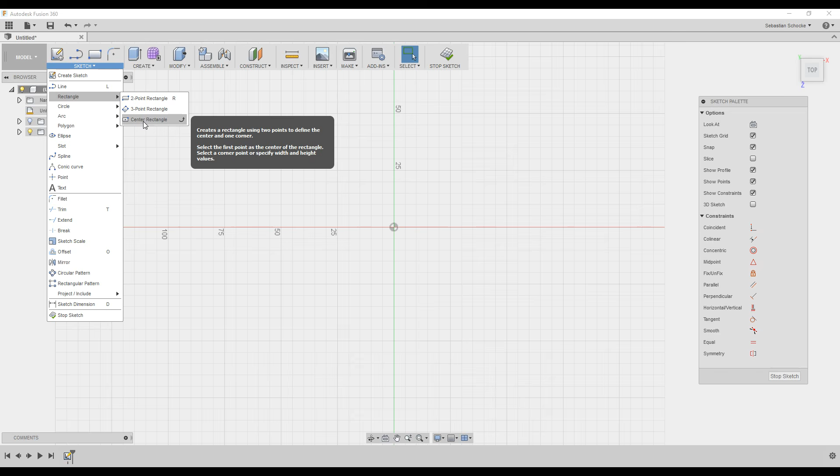The reason I use center point rectangle, as a quick tip, is I like to create all of my sketches around the origin point of the object. It makes for simpler symmetry and working with assemblies in the future when we have multiple components. So let's go ahead and do a center point rectangle.

Then we switch back to our drawing quickly. The height was 53.3 and the width was 68.6. This one was 53.3, 68.6. Pressing tab after you've typed in the dimension will lock that dimension in place, as evident by the little lock icon next to it. Now press enter. We will now have our fully dimensioned rectangle.

Quick tip number 2, to get that to fit nicely, you can simply double click your middle mouse button and it will make sure to bring the entire sketch into the viewport.

Now this will be the outline of an Arduino board, but let's face it, manufacturing isn't perfect, so we can't create an enclosure that will fit perfectly around an Arduino UNO. What if it's 0.1 millimeters longer than what it should be? So we are going to create an offset around this shape to give us some space.

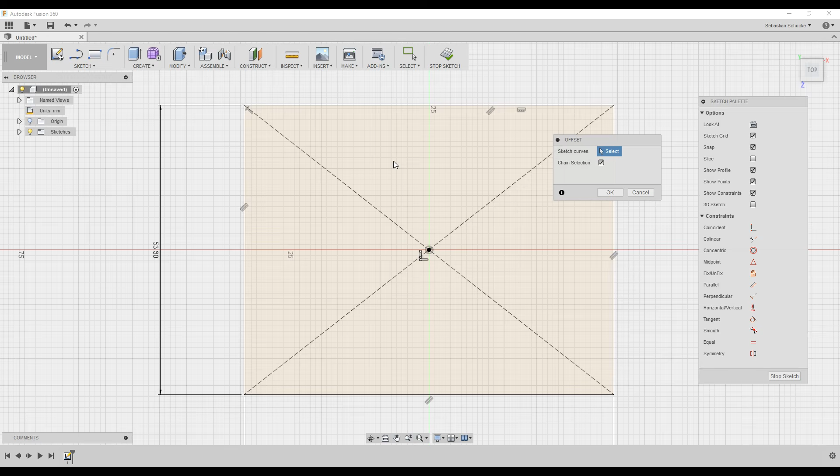Under the sketch option is the offset command. It's got a shortcut key of O, for future reference. Click the shape of the rectangle and it will allow you to create an offset either inside or outside of this object. I'm going to say I want to create a 1 millimeter gap around my board for the inside of my enclosure. Hit OK, and now we should have a second rectangle in place.

Now, as this rectangle, the inside rectangle, plays no part in our actual geometry and is simply there for reference, I'm going to convert it into construction lines. Construction lines are like these dashed lines that are present on the sketch already. They are there simply for construction purposes, i.e. they don't play any part in your actual geometry. They are simply there to provide reference points for the rest of your sketch.

To do that, you select your line and then under your contextual options you have normal/construction. This toggles the line between a normal line and a construction line, or one could use the shortcut key X. So once you convert it, you should see it turn into a dashed line. I'm going to do that for the other 3 edges of our inside rectangle. And now we have our rectangle giving us our profile for this enclosure's inside.

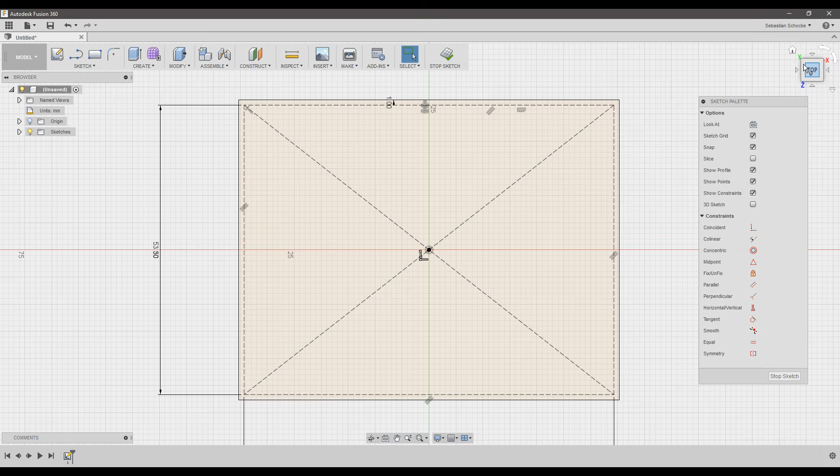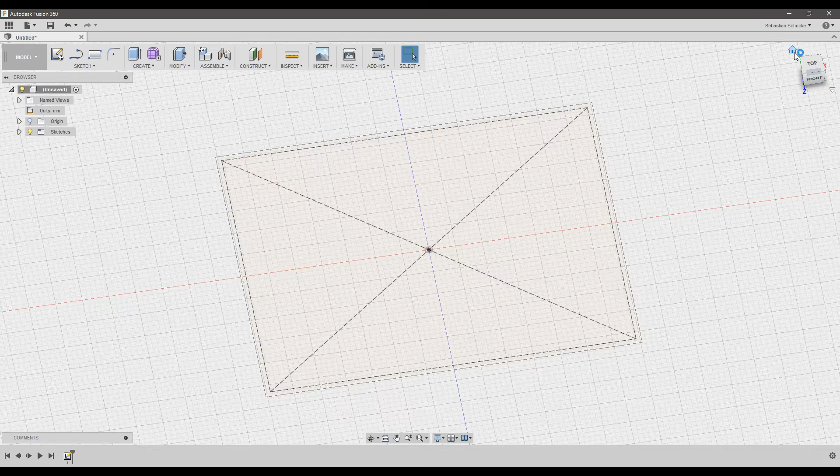I'm going to stop this sketch here and return to 3D view. The view cube up here always tells us what view we are currently in. It gives us options to jump to different views. Also, if you hold shift and the middle mouse button and drag, you rotate around your design. In this case, I like working in the home view, which is a 3D view of your current design.

And now we are going to take this rectangle and get a cube by extruding it. To create, there's an extrude option, shortcut key E. Use that to turn this into a solid object.

So first of all, it asks us to select our sketch geometry, which is our rectangle, and then we can use this little arrow to drag it out to the size we want it to be, or you could also type in the height that you want. In this case, we want this to be 22 millimeters high. Why 22? It gives us enough space for an Arduino and some leg room on the top and bottom.

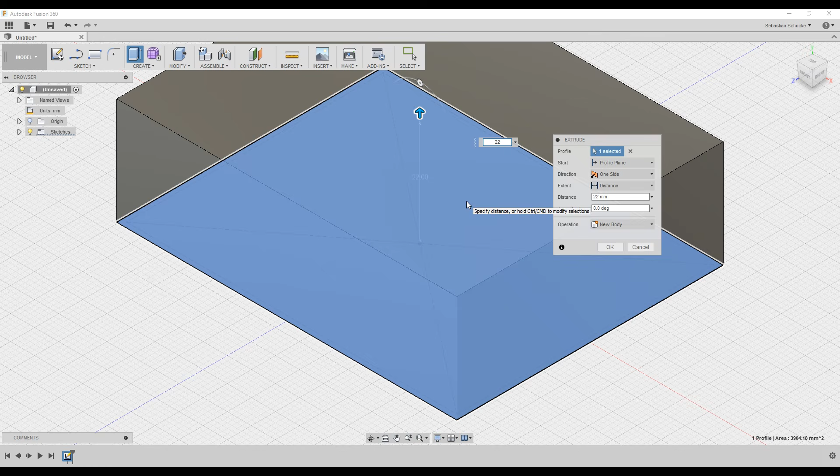Press on the home button again, it should bring our cube into view. Next, this may seem very counterintuitive because all that we have now is a solid cube, and at that we create the cube around the inside dimensions of what we want our enclosure to be. Seems very counterintuitive to design this way, but what we have actually done is we are going to use a trick in Fusion 360 specifically for situations like this.

This block represents the negative space we want to create inside of our enclosure. So to do that, we want to create a shell around this space. Use the modify shell command. What shell does is it removes material from a part interior, creating a hollow cavity with walls of a specified thickness. What we are going to use it for is a trick, though.

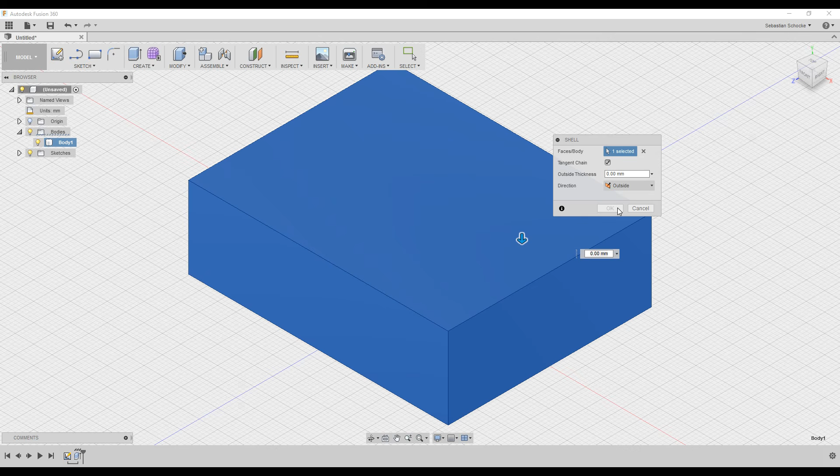We are going to use this entire body. So instead of selecting each one of the faces manually, we are going to expand our bodies here. We're going to say, I want to create this body, and then our direction that we are going to use is outside. What outside means is we are going to create a shell around the outside of this body instead of shelling this body itself. And then I am going to make the thickness of this shell 1.6 millimeters. Okay.

And now it looks like we have simply created a slightly larger cube. How do we know that it is actually hollow inside? We are going to use one of the features from Fusion 360, section analysis. Under our inspect menu, see there is an option called section analysis. Section analysis allows you to create cutaway views of your 3D geometry. I'm going to select this face. Then as we drag this backwards, see we have actually created a hollow block.

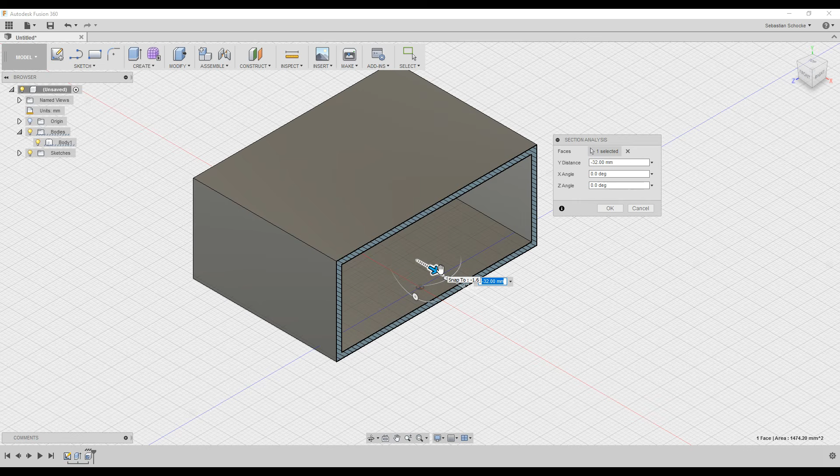We don't need to leave the section analysis in place. It is purely there for viewing purposes to make sure that our command has actually succeeded. So in this case, I am going to cancel it, and we are going to work further from here.

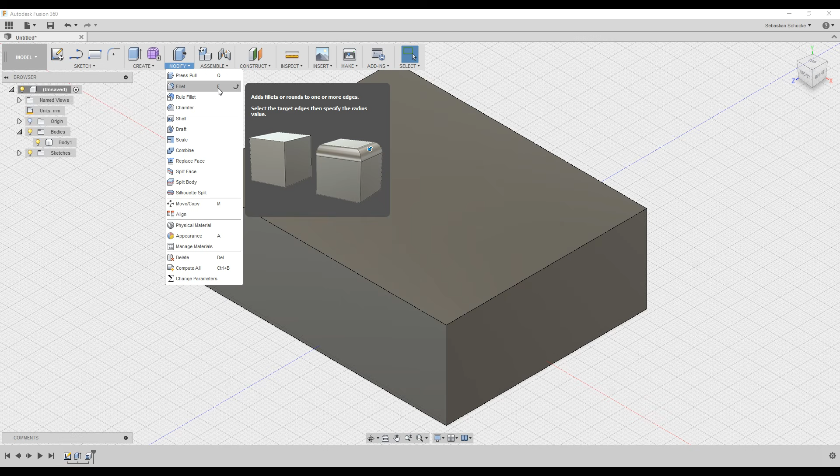Next up, what I want to do is I want to create rounded corners for my enclosure. Simply, I do not like these sharp edges, and I do not think that it will be very aesthetically pleasing. So we will go and modify our object once again, and then you'll see there's a command called fillet. Fillet rounds an edge. It is a very often used command, so it also has its shortcut key F, and then it asks us which edges do we wish to fillet.

In my case, I want to do this upright edge, this upright edge, rotate around this way, this upright edge, and this upright edge, and I want to fillet by 2 millimeters. 2 millimeters creates a 2 millimeter radius edge. Once you're happy, go ahead and hit OK. And if we look at our object, we have neatly rounded edges now.

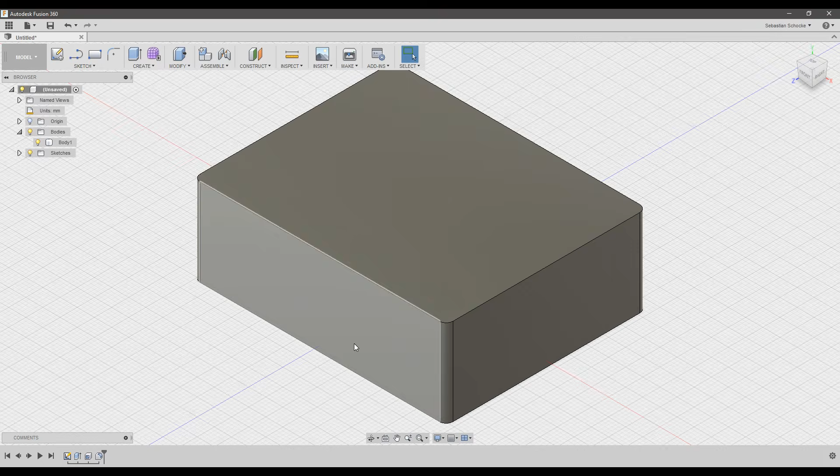Now, this enclosure is pretty useless to us at the moment because it's a solid box. You can't get anything inside of it. Let's fix that. We want to slice this box exactly in half so that we have a top half and a bottom. To do that, find a midpoint between the bottom and the top of this box. We are going to create what is called a mid-plane. Under your construction options, select mid-plane. It creates a construction plane at the midpoint between faces or workplanes. We want to create the mid-plane between the top of this box and the bottom of this box, and you'll see our workplane.

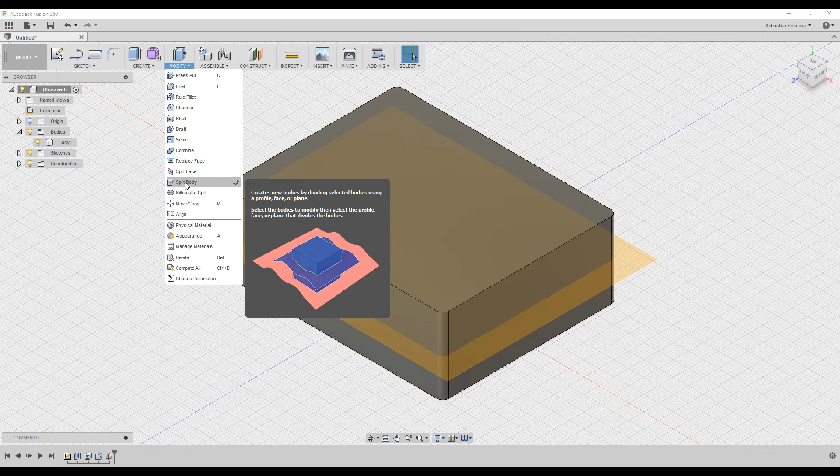Now what we want to do is we want to actually split this body along this workplane. Once again, we go to the modify option, and there's an option called split body. Split body allows you to split a physical body into more along any plane or profile that you can select. In our case, we want to split this body, and as our splitting tool, we want to use this midplane. You should get a red circle indicating how it's going to cut. If we hit OK, you should see body 1 and body 2 have become 2 bodies.

You can now turn off this construction plane, and then have a look. You can switch off the top of this lid, the lid part, or we can switch off the base part and have a look inside of our lid.

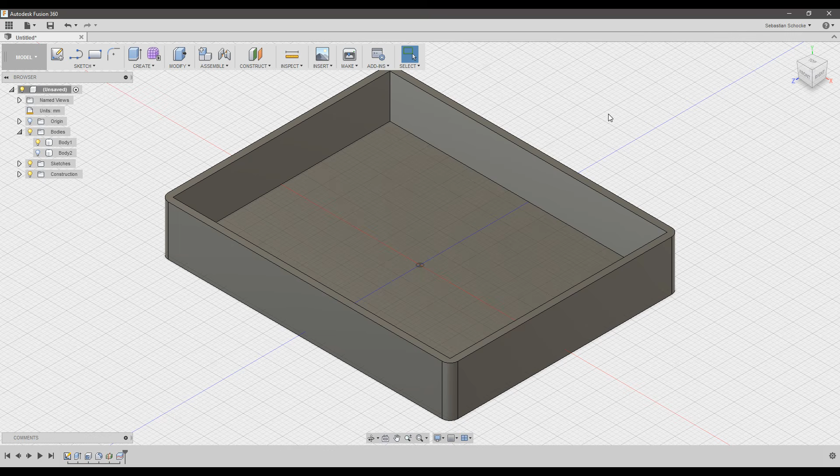For now, we are only really interested in the bottom part of our box because we still have to create our mounting pins. So for the mounting posts, we need to follow the outline of the holes on our dimension drawing.

So let's get started by saying we need to create another drawing on the inside of our bottom face of our enclosure. Jumping back into Fusion 360, we'll go to create a sketch, and this time instead of creating it on a plane, we will create it directly on the inside face of our enclosure. Just right click, middle click and drag a bit to get it back into view.

Now if you remember correctly, the inside of our box is 1 millimeter bigger than the dimension drawing of our Arduino. So we could go ahead and increase all of our dimensions by 1 millimeter, etc., to get it to the correct positions, but that is going to be a lot of keeping things in mind, especially if we later want to make changes.

One of the nice things about Fusion 360 is we can project things from other geometry, other sketches, etc. into the sketch that we're going to do to base things off of that. So for this, we're going to go to Sketch and Project Include, Project, or shortcut key is P. And then we can go and look at our sketches, and we'll activate sketch 1, which was our original sketch that we made for the inside of the Arduino.

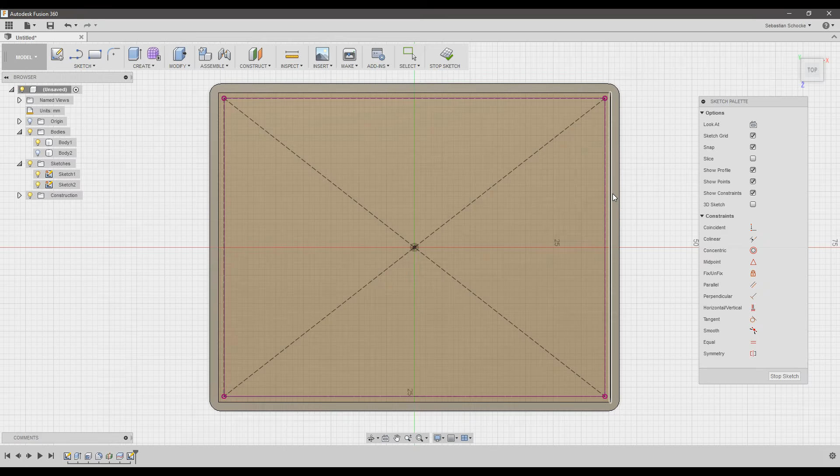And now we can go and say, I want to project this outline of the Arduino that we created to this drawing. Say OK. The lines will be projected, as can be seen by the purple lines that are present, and now we can switch off that sketch again. And there we have our original Arduino outline that we created.

If we go back to our drawing now, we can see there's 4 holes, and if we look at the notes, we can see that all the Arduino mounting holes are 3.2 millimeters in diameter. We're not going to create our mounting pins to be 3.2 millimeters, because they would be way too tight while we try to get our Arduino to fit over there. So instead, we're going to make them a little bit smaller. We're going to make them 2.8 millimeters.

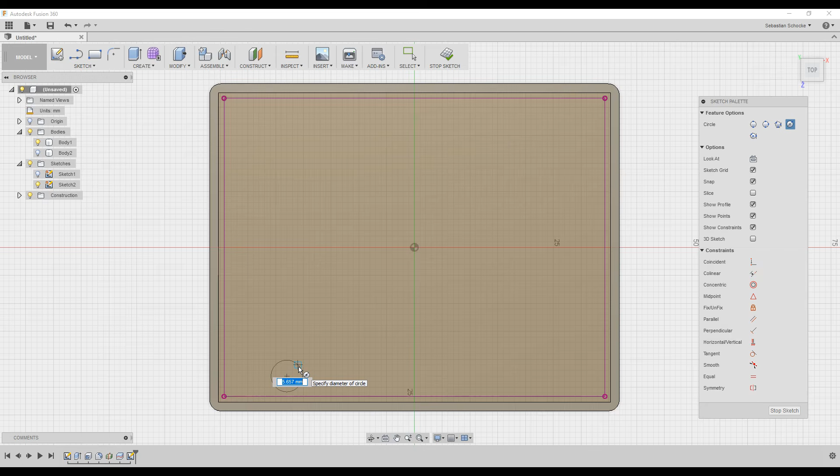Also, have a look at the pattern that they are in. We are going to just put down our pins, and then we'll worry about the exact positioning after we've done that. Let's jump back into Fusion 360, and we're going to go circle, center diameter circle, shortcut key C, and we can say we have a circle here, and we are going to make it 2.8 millimeters in diameter.

Then we can continue and say there's going to be another one up here somewhere. I'm not going to give it an exact dimension. Instead, I'm just going to put it down. Create another one over here somewhere, and another one over here somewhere.

Instead of giving them all dimensions and making them all 2.8 millimeters, to make sure they always stay the same in case we change one, we will simply use the sketch constraint equals. We select this circle and that circle, and they will be made equal, that circle and that circle, that circle and that circle. And now we have 4 circles that will always remain the same size if we should resize our pins.

Let's head back to our sketch, and we can see that the 2 holes or pins on the right hand side will be aligned directly underneath one another. Let's go back into Fusion 360 and make sure that we have a similar constraint here. So we will select that point, hold shift and select that point, and now we're going to select that they should be horizontal or vertical from one another.

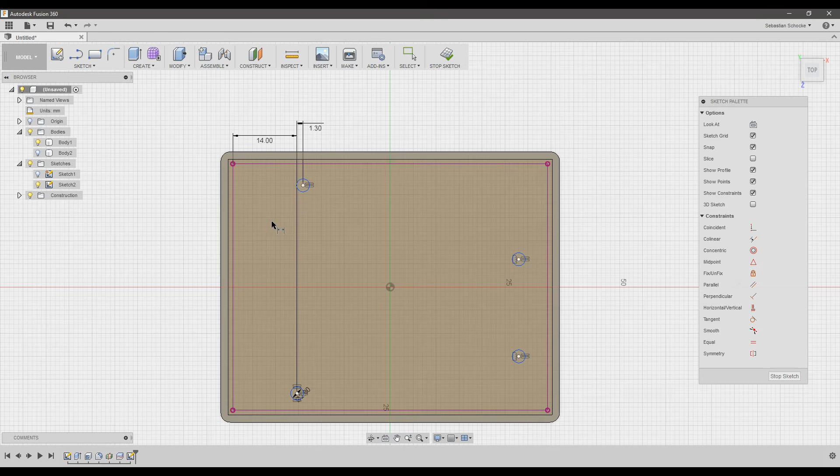Then, as our final dimension, it is specified that the holes on the right side of the board are 50.8 millimeters further from that hole. Let's add that dimension. We're still in the dimensioning tool. I'm going to say from the center of that one to the center of that one should be 50.8 millimeters. And what you will see is that the bottom hole moved along with the top hole because we told them they need to stay vertically aligned with one another.

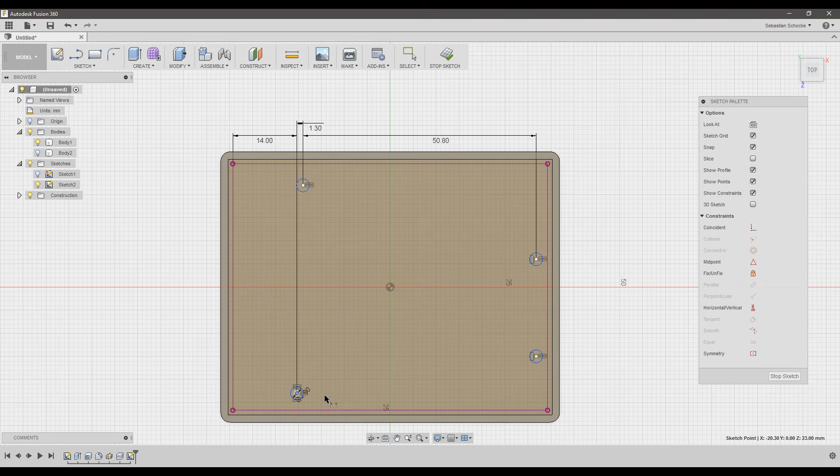Now we can move on to the dimensions from the bottom to the top. Jumping back to our sketch, we see that the bottommost hole is 2.5 millimeters from the bottom of the board. Dimension tool, between that hole and that we want 2.5 millimeters. Then our next hole is the one on the right hand side, which is specified as being 5.1 millimeters above that previous hole. Go back in, dimension from that hole to that hole is 5.1 millimeters.

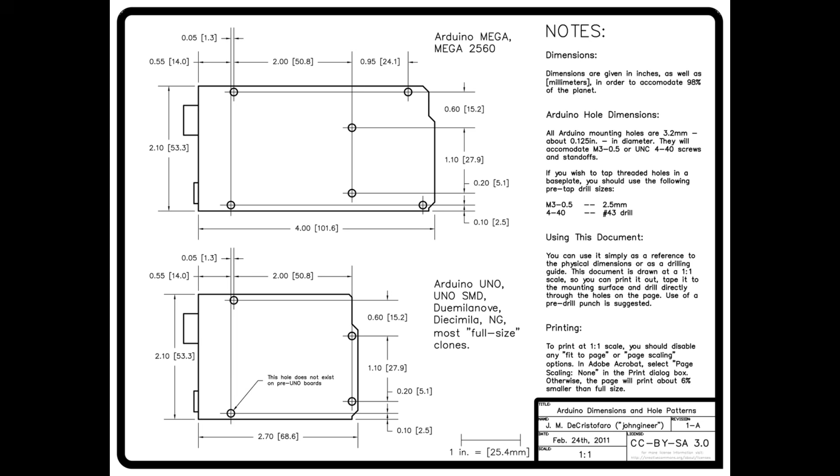Jumping back to our dimension, between those two holes is 27.9 millimeters. Dimension between there and there, 27.9 millimeters. And our last dimension is the topmost hole is 15.2 millimeters above that hole. Go back here, dimension, the distance between that hole and that hole is 15.2 millimeters. And there we have our drawn out mounting pins.

So what we are also going to add to the sketch is the fact that we do not want our Arduino to be lying on the bottom of the board. So we are going to add some standoffs that are also 3D printed into the base. These standoffs are going to be centered along exactly the same area as our mounting pins. So let's use one of the tools that we have learned already to create that, and say we're going to do an offset of that, and we'll offset it by 1 millimeter. And we do the same thing for all of our pins.

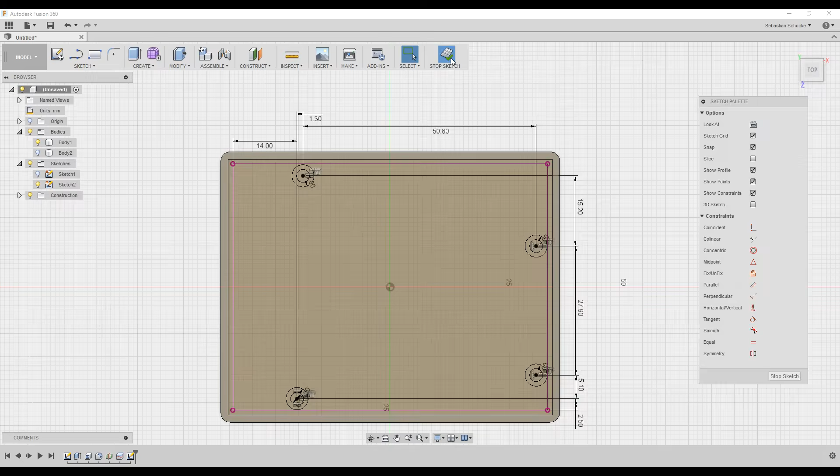In this way, we have now created a slightly larger circle that is too large to go through the hole of the Arduino. In other words, once we've slid the Arduino down over the mounting pins, it will rest on those pillars. If we are done with this, you can go ahead and stop the sketch. And now we are going to extrude our mounting pins that we have put in place. So, first things first, grab the extrude tool. It will ask us to select the profiles that we want to extrude, and we are going to use the inner circles

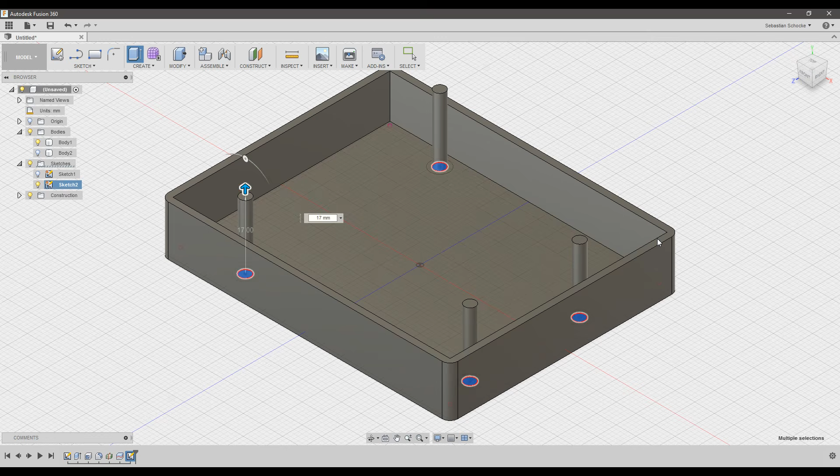for our mounting pins. After some experimentation, I have come to the conclusion that 17 millimeters is a good length for our mounting pins, and make sure that our operation is join. That means that the pins will be joined to the existing lid base of our enclosure. Hit OK, and then we should have our mounting pins.

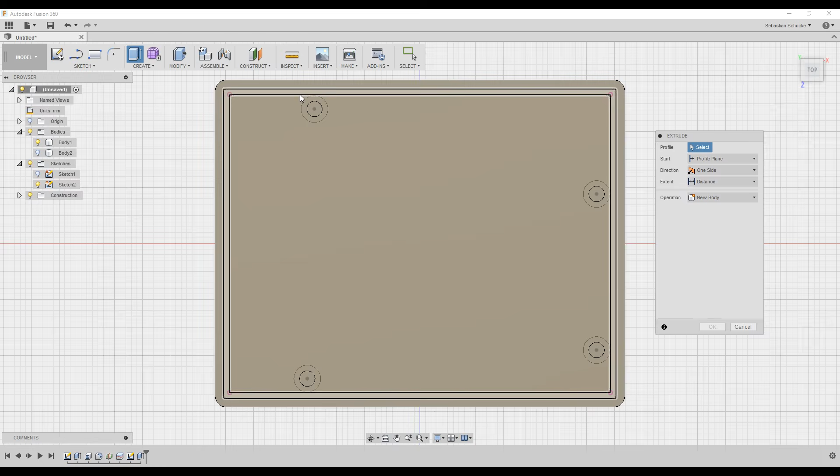Now we want to extrude the standoffs as well, but our sketch has disappeared. We can easily go back, and that is a feature of Fusion 360. Once you have done something based on a sketch, it will automatically hide the sketch for you, assuming that you are finished with that sketch. But that is not the case here. We still want to do more extrusions based on that sketch, and you can. You simply reactivate that sketch. I am going to go back into my top view to make it simpler to select those circles. Hit extrude again and extrude the outer circles.

Of our design. Go back into 3D view, and for these, 4 millimeters is a good height to extrude them to. Once again, make sure that join is your active operation. This will ensure that the standoffs become part of the base and also become one solid object together with your mounting pins. Hit OK, and now we can go and disable that sketch.

Fusion won't disable it for you again because you have manually made it visible now. So let's go and put it off, and then we should have some mounting pins in our design. And with some luck, we should have mounting pins that our Arduino will be able to fit over.

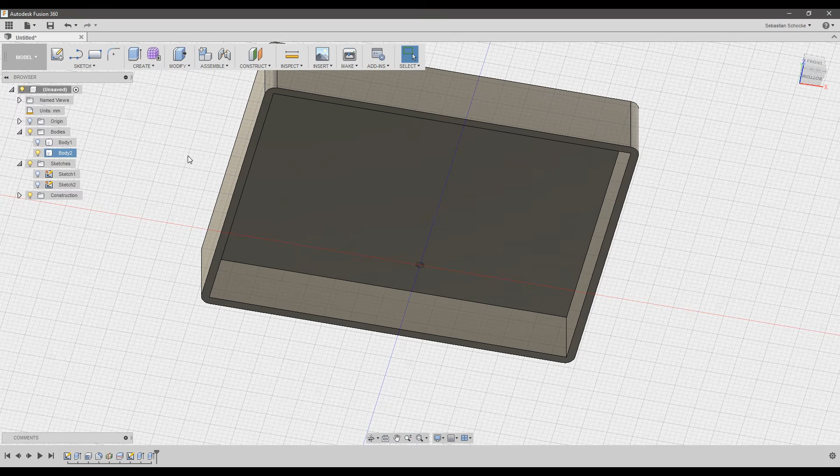As the next step, we will be adding the receptacles for the mounting pins into the lid. To do that, we are going to first hide our base and make our lid visible. And now I'm going to wrap around, and we're going to say we want to create these on this inside face of our lid. So as usual, create sketch, select the inside face of our lid, and there we now have our sketch ready to be started drawing.

So now we could do this whole rigmarole again of finding out exactly where to lay out the holes, or we could use our projection trick. So what we will do is we will go and look at sketch 2, which is where we created our holes or our mounting pins, and then we are going to use project, shortcut key P, and we'll project the 4 mounting pins into our sketch. At this point we can say OK and hide sketch 2 again, and there are our mounting pins from the bottom.

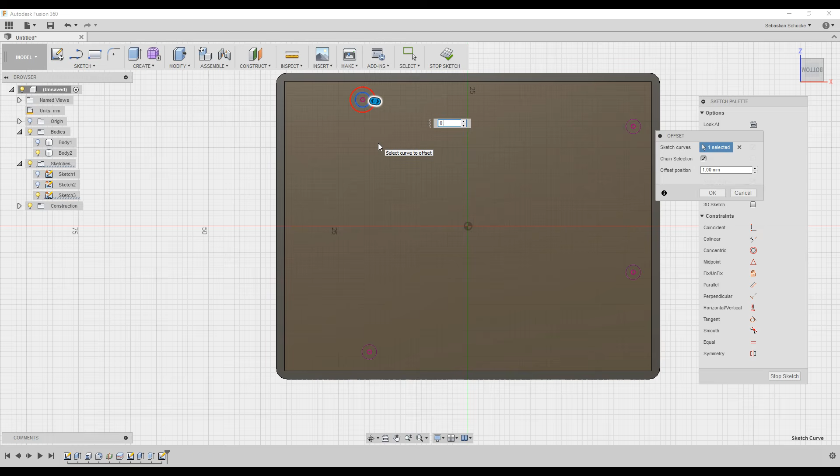After we've done this, we are going to offset our holes just by a little bit, to make sure that the pins slide into it easily. So once again, we'll use the offset tool, shortcut key O, say that, and I am going to make it 0.2 millimeters bigger. Same for this one, offset 0.2 millimeters, offset 0.2 millimeters, offset 0.2 millimeters.

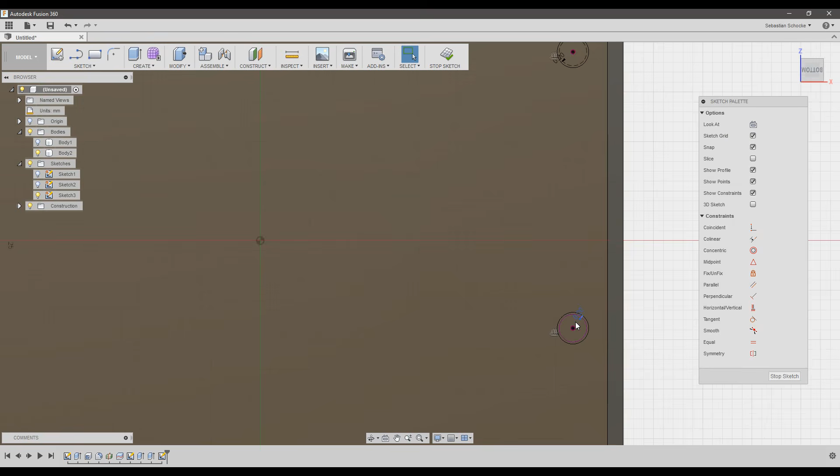And then I'm going to go and turn this to a construction line, press X, and with our top one. Remember these are the circles that we projected in from our previous sketch. And we have the holes. Now we also want to obviously have the hole be inside of something.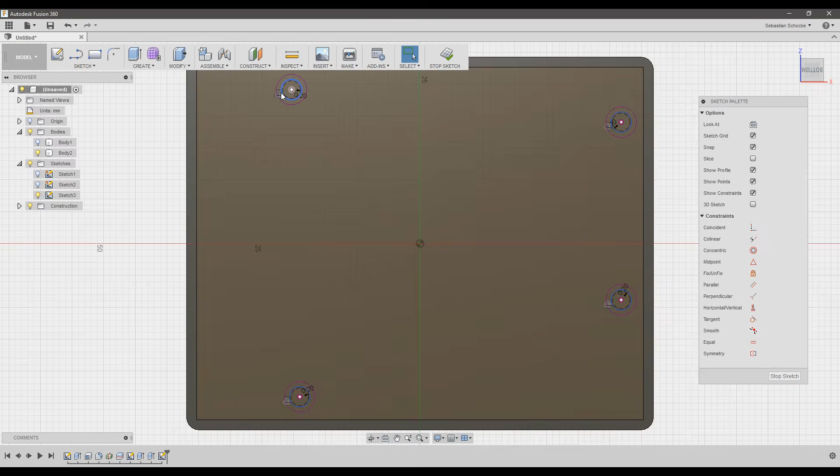So for this purpose, I'm going to re-enable sketch 2 again, and I'm going to say I want to project our standoffs' diameter into this sketch as well. Click OK, turn off sketch 2 again. There we now have the outlines of those ones, and if we go and have a look, we should be able to select faces of these halves of these circles to create our standoffs.

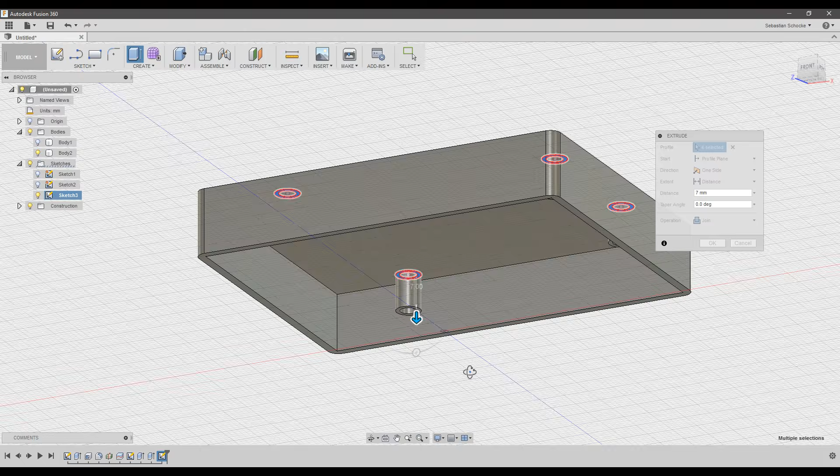So now we can say stop sketch, we can hit extrude, E shortcut key, and we can select our circles that we want to extrude. Bring this whole thing into a bit of a 3D view, and say I want to extrude these for 7 millimeters. 7 millimeters was tested so that our mounting pins slide into it nicely, but there's still enough space at the top so that it doesn't interfere with any of the Arduino UNO's components. It's OK, and there we now have receptacles for our mounting pins.

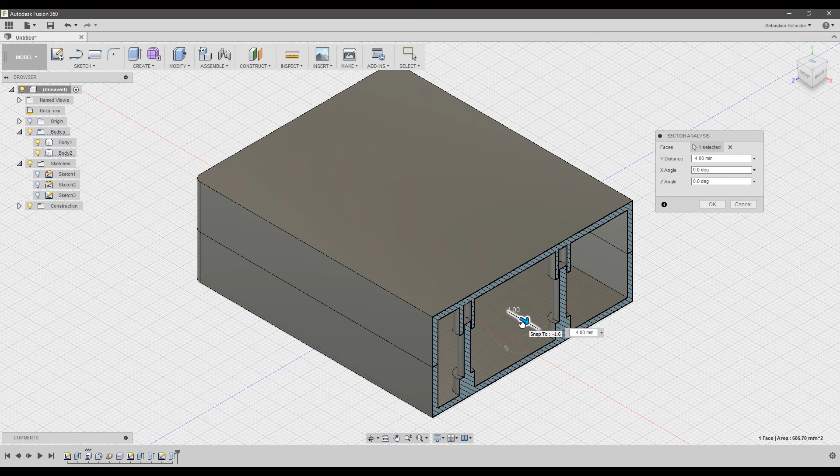At this point in time, we can now go back into our 3D view and enable our base, and now we can use our sectional analysis trick again to do an analysis and see that our mounting pins are in fact there and that they do, as a matter of fact, connect into one another. I'm going to cancel this again because we won't be using it.

Now, for us to be able to do any kind of assemblies, for instance, to say that this lid is interconnected with the base, or as our next step is going to be, importing an Arduino UNO into this design to check that it is working and also to facilitate the cutouts onto the side of this enclosure, we need to convert our bodies into components.

So let's get started. To convert something into a component, you select your body, right click, and say create components from bodies. So this is our bottom, and you should see it turned it into component 1. And then if you slow double click on it to open up the rename, I'm going to call this the base.

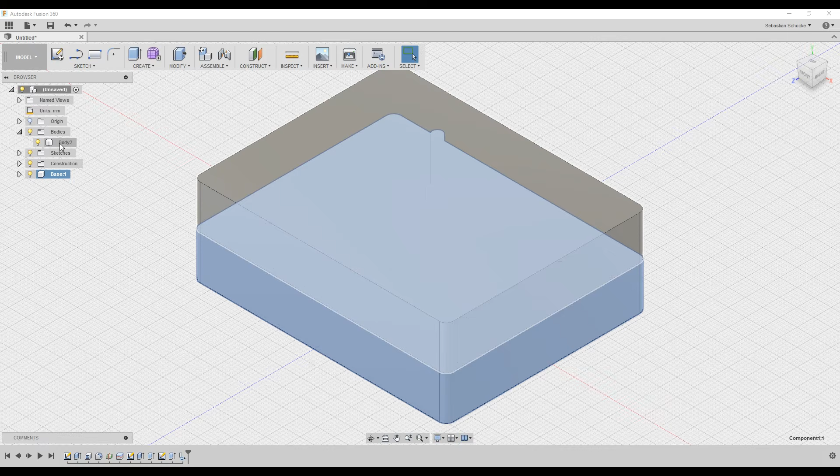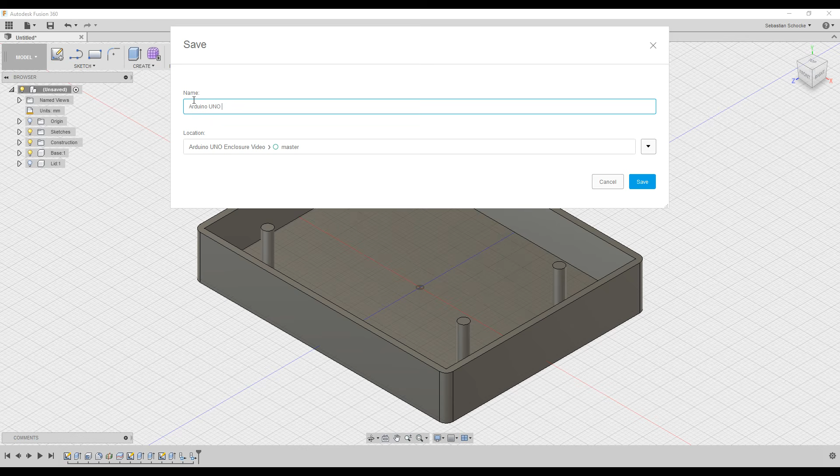Convert this one into a component, and I'm going to slow double click and call this the lid. And now we've got two separate components which we can turn off, and they are named nicely. This is also a good place to save. Since we have done a lot of work now, I am going to save mine simply as Arduino UNO case.

Saving is also a requirement at this point in time because we are going to import another component into this design, and you cannot import components into designs that have not been saved yet. To import this design, go to your show data panel and you will see I already have an Arduino UNO model imported here. However, you might still need to do this.

The Arduino UNO model is available in the gallery on Autodesk Fusion 360's gallery, and also available as a link in the description of this video. To upload it, you would download it to your computer and hit the upload button here. Select the file from your computer and it will upload it into your data panel.

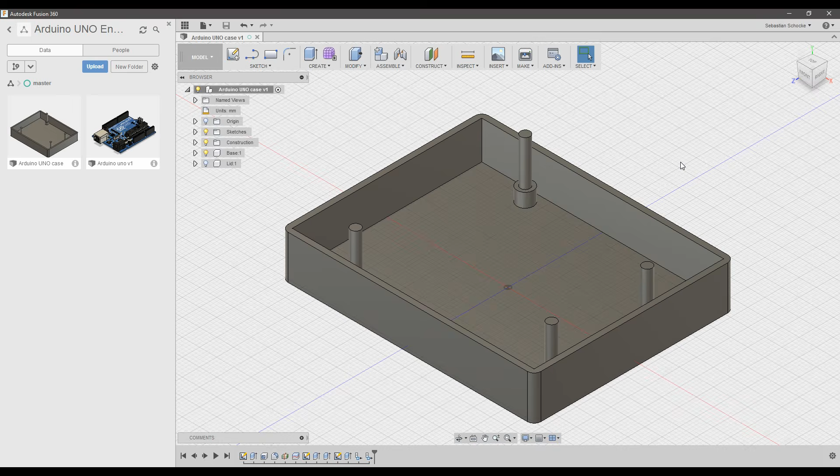To insert this Arduino UNO into our existing design, click and drag and drop it into your design. It'll come up looking like this. It automatically drops the design at the origin. I like to, when doing assemblies, move my components a bit out of the way so that I can clearly see them separated.

Let's hit OK after positioning it a bit away, and you should see you now have an Arduino UNO, and it should show in your browser list on the left here as well. At this point, I'm going to hide the data panel again to give us maximum workspace.

As a next step, we are going to assemble this Arduino UNO into our enclosure. This can be done in many ways. You can also simply move it into the correct position and rotate it and do it that way, but Fusion 360 allows us to build assemblies that have joints specified. For this specific case, we are going to make a joint between our hole on our Arduino UNO and one of our mounting pins.

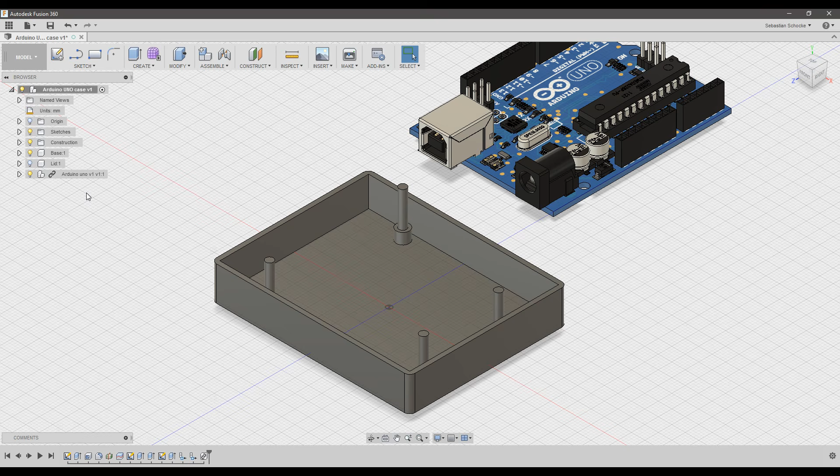As a start, for any kind of assembly, you should always have one grounded component. What is meant by grounded? Grounded means that it is restricted entirely in its movement. It cannot move up or down or left or right or rotate in any way. For this one, we will be doing that with the base of our enclosure. To ground it, simply right click on it, select ground. If it's been grounded, you will also see that the icon next to it changes and shows a little pin on it to show that it has been pinned down in place.

As a second step, to make it possible to move the Arduino UNO as one entire group when we do the assembly, we are also going to right click on the Arduino UNO and say rigid group. Rigid group basically means that all the components inside of this design will stay in exactly the same position relative to one another once we start moving it. It asks us if we want to continue, and say yes, and then it shows you there's 88 components inside of this Arduino UNO, and we are going to hit OK to turn it into one solid group. Turning it into a group does not mean you can no longer work with the separate components. It just means that they move in relation to one another.

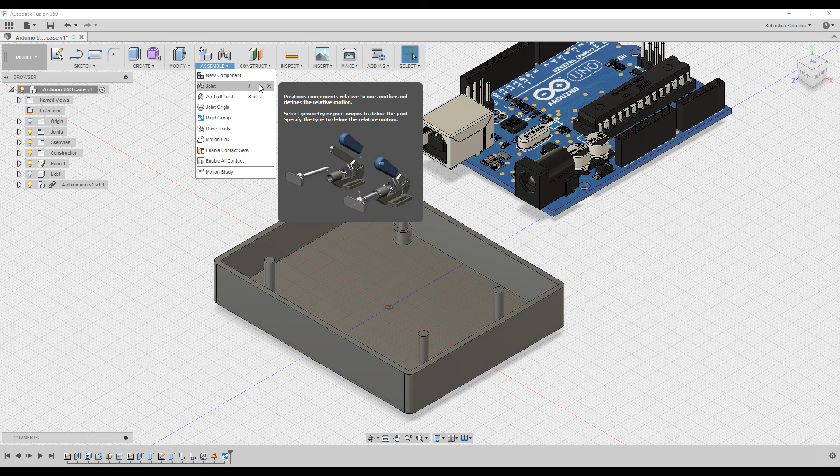As the next step, we will be adding the joint. This can get a little bit tricky, and we won't be spending an entire chapter on this, as this is only an introductory video, so please just follow along. Basically, under assemble, we will say joint, shortcut key J, to create a new joint. The first component you specify is the component that you want to move. In this case, I want to move this component, and then we have to select a reference point that we want to line up with a reference point on the other component.

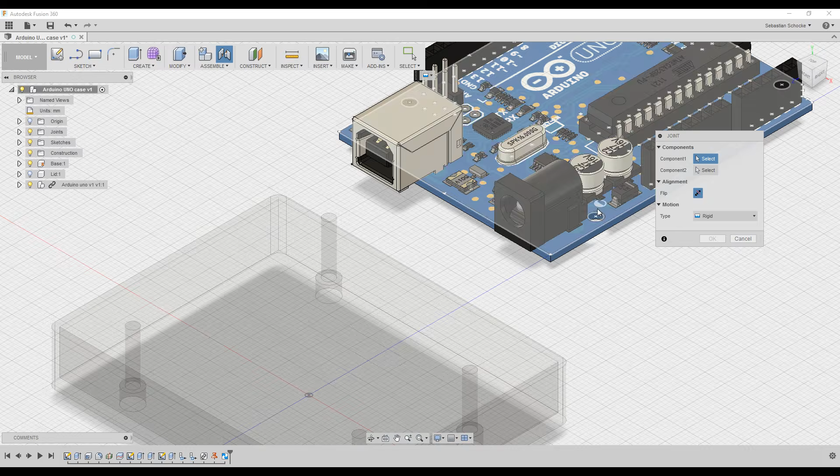In this case, I want to select this hole. Make sure it comes up with the cylinder when you hover over it. Hold the control button to snap in place the face that you want to select, and now you can move the mouse to select a specific point on that object. I want to select the bottom of this hole as my first component reference.

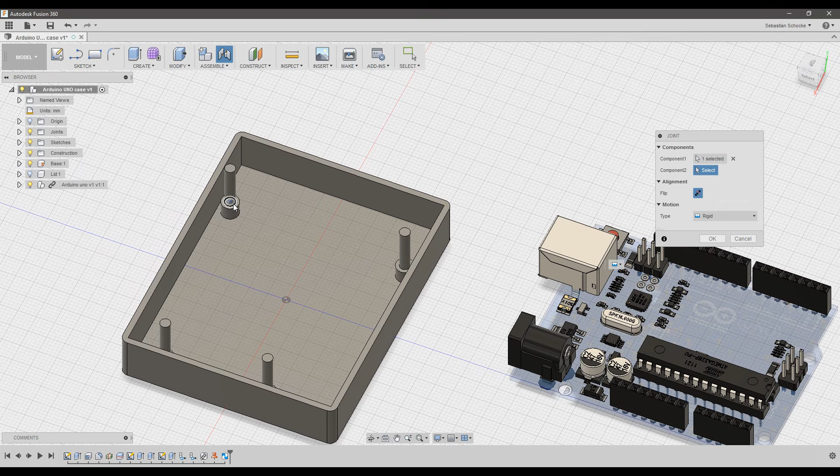Then I want to move over to my enclosure, and that hole is supposed to go on this mounting pin. So now I will just rotate this a bit to make it a little bit easier to work with. Zoom in here and say the point I want to align that one with is on this face. Hold control, and it gives me the ability to select the snap point, and I want the middle.

If you zoom out, you will see that currently it only moved the PC board. The reason for that is it only selects the component that you've selected. The Arduino UNO consists of multiple components, but for the preview of moving, it will only show us the PC board, since that is the component that we selected. Once the joint has been completed, all the components still visible over here will move back into place.

We have created a rigid joint. What rigid means is once it's done, you will not be able to move this PC board at all anymore. Currently, this PC board is orientated the wrong way. So to correct that, we'll grab it here on the rotate handle and simply rotate it by 90 degrees so that it is in the correct position.

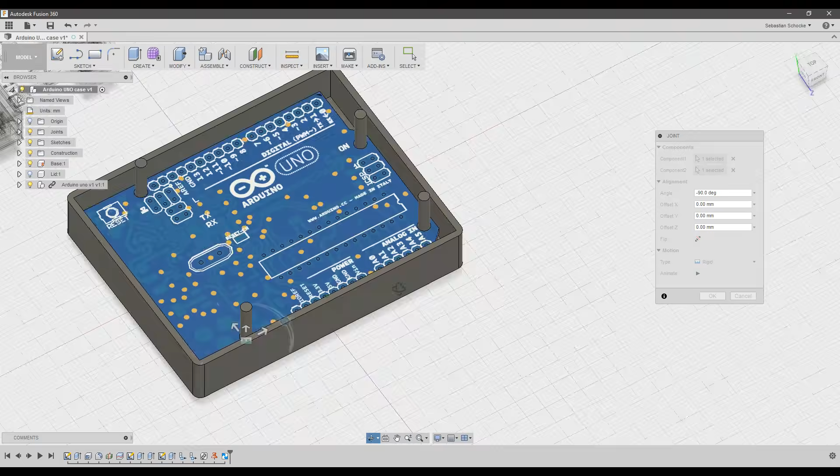At this point, you can have a look and see that all of our mounting pins align neatly with our Arduino board. And if we hit OK now, all of the components will move into place, and we will have a fully assembled Arduino board in place on our assembly.

Those eagle-eyed amongst you will have noticed that we have a slight problem with our design. If we rotate this around a bit, our components are sticking right through our enclosure. This is obviously not the kind of thing we want. We want those connectors to be visible through our enclosure.

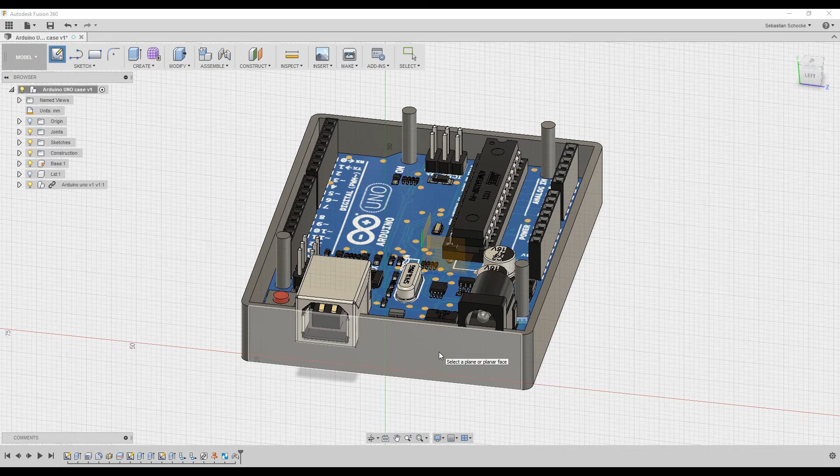What we are going to do is create a sketch on this side based around the geometry of the connectors and use that to make holes in our enclosure. So let's get started with that. As step number one, we will specify that we want to create a sketch, and this sketch will be based on this face, the outside face of our enclosure. For the next part, I like to actually turn off that part so we can easily see the Arduino with the components that we want to project coming through.

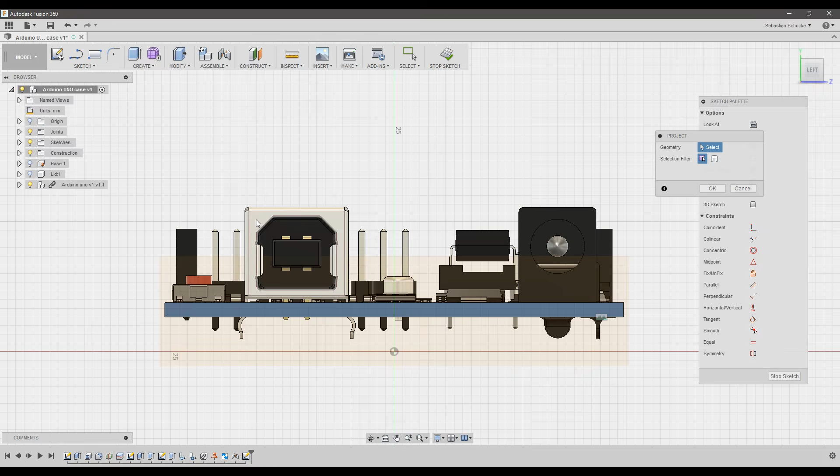Once again, we'll use our project tool, shortcut key P, and now we are going to say I want to project this face and this face of our connectors. Why did I not select all these outside parts of our USB connector? Well, if you rotate this around a little bit, you will see those are rounded filleted edges to make the connector look neat. They will not work very well for our 2D sketch, so that is why I have only selected the flat face over here.

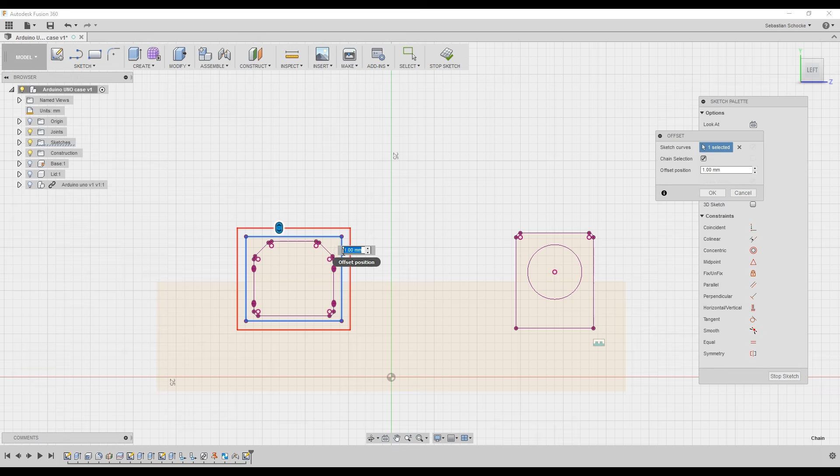I'm going to turn off our Arduino now so that we can work easily within our sketch. And now we will say I want to create an offset around this one, and in this particular case I want that offset to be about 1 millimeter big to make sure that our USB connector fits through there comfortably.

Do the same on this side, offset, outside part, and for this one I'm going to make it a little bit smaller, 0.8 millimeters, to be about the same dimension as our USB connectors. Offset.

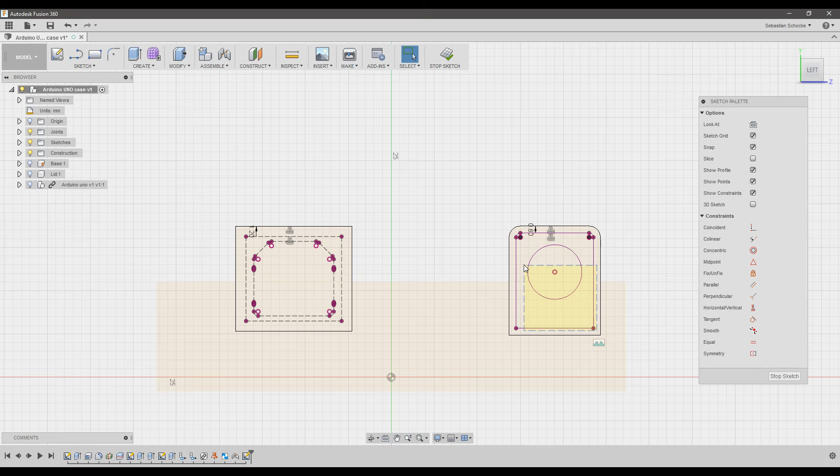Turning off the Arduino again, we can now say we want to put all of these lines to construction and everything inside of here to construction. This way I have two solid profiles to work with, no holes on the inside.

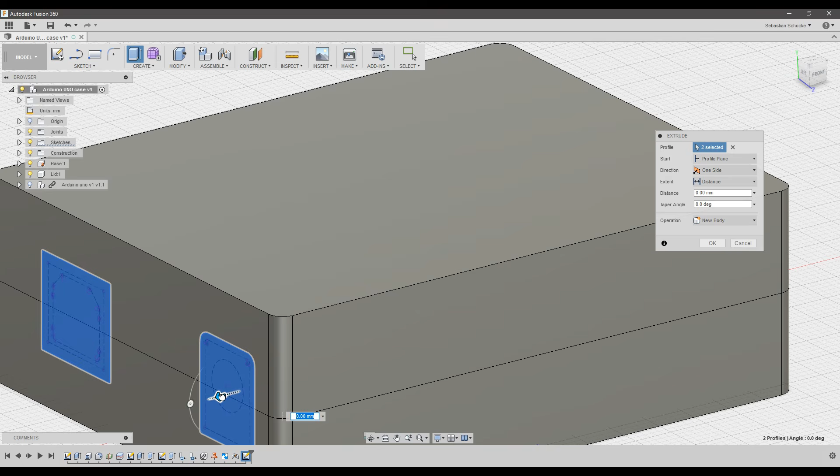Next up, we're going to re-enable our base and our lid, since we want our cutout to be through both. Stop the sketch, hit extrude, shortcut key E, select the two cutout profiles, get back into a bit of a 3D view, and now cut through this enclosure. Note that the Arduino UNO is not visible. In other words, this cut command will only cut through visible components. It will not cut through any component which is not visible at the point in time that you cut.

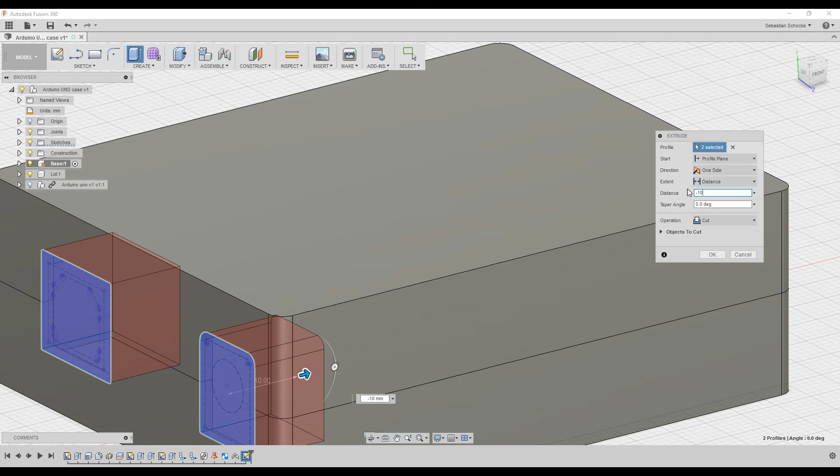Also, I am going to make the cut minus 10 millimeters to make sure that even if we do make the wall on our enclosure a bit thicker, the hole will still be all the way through. If we hit OK, you should now see that you have two neat cutouts in the enclosure, and if we re-enable the Arduino, our power connector and USB connector should be clearly accessible through the enclosure.

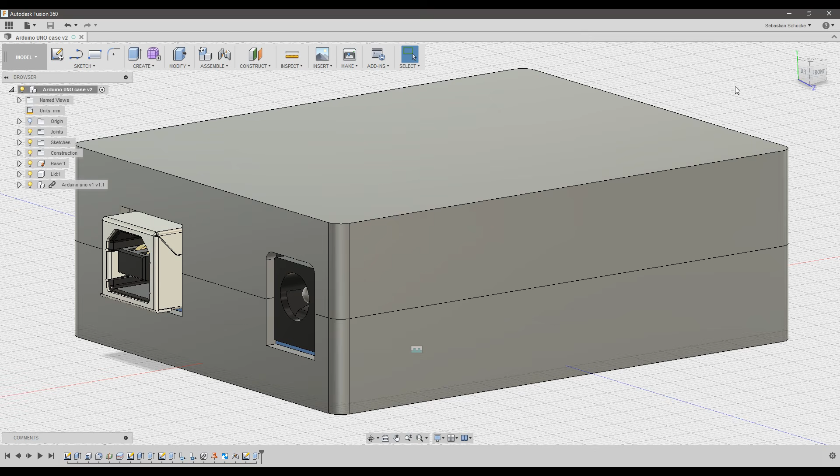I'm going to save again at this point, as we have just completed a major part of the work. As our next step, we have now got an Arduino enclosure, but in my opinion, it's not very pretty. It's usable, but it's not very pretty. So what we'll do next is some small work on the cosmetics and usability of our design.

As a first step, I would like to chamfer the tips of our mounting pins. This will have the effect of making it easier to slide the Arduino UNO over it, and also for them to slide into our mounting receptacles at the top of the lid. For this we will use the modify chamfer command.

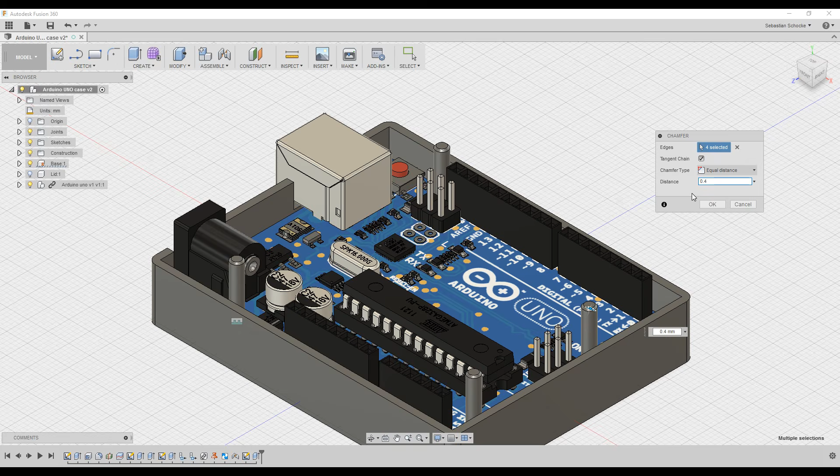This allows us to select edges. In this case, I am going to select all four of the edges of our mounting pins and chamfer them by 0.4 millimeters. As you can see, this will have the effect of tapering them off, making them much simpler to slide into something.

The next step, we also want to be able to access our Arduino UNO's connectors through the lid. So what we'll do is we'll activate our lid again and create a sketch on the top face of our lid.

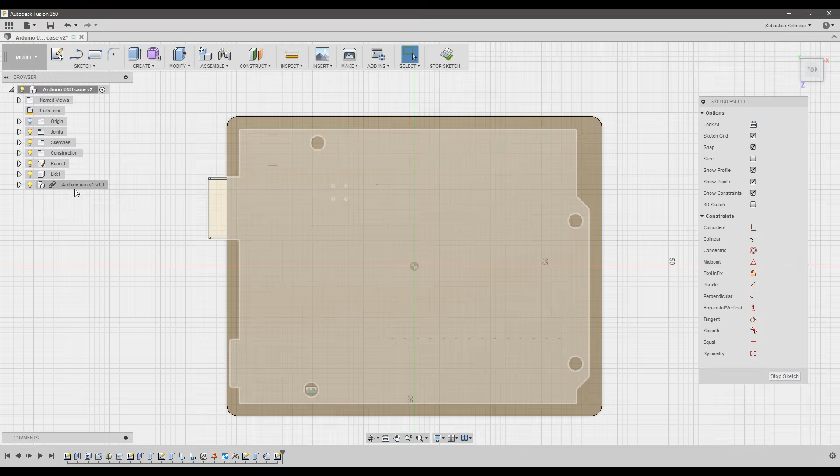In this case, we need to know where the pins are of our Arduino UNO. So let's for now disable our lid, and then we use our old friend projection, shortcut key P, and in this case I'm not going to project the entire geometry. All that really interests us is this point up here, this point over here, over here, over here. This will give us 4 points, 2 points for each connector, to draw a rectangle.

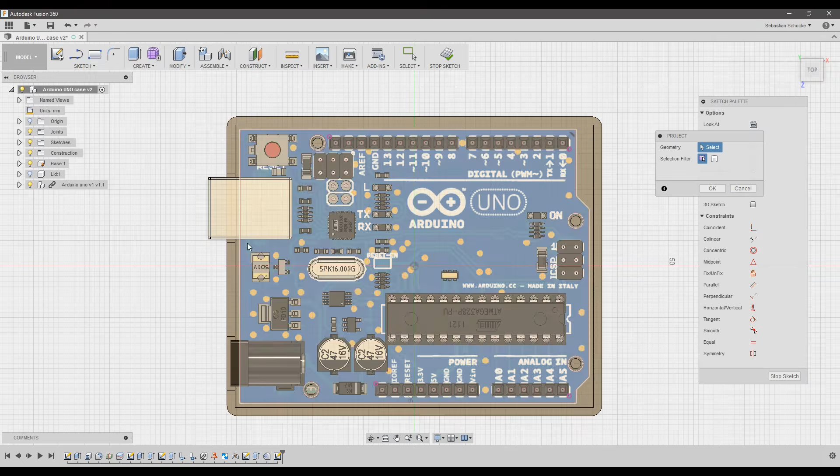In this case, I'm going to put our lid back on. Click OK here for projection to be finished. And then we're going to use 2-point rectangle, shortcut key R. Select the first point, select the second point. Same for the bottom one. Hit escape, and we have our 2 rectangles.

Now we could use these as a direct cutout, but probably we do not want to have holes that are exactly the same size as the pins that we're going to be putting through there. So let's use our old friend offset, shortcut key O, to make these a little bit bigger once again. Now this is an interesting example with the offset command. Sometimes you will find that even though you're using a positive offset, it's going to the inside of your shape, and you would have to use a negative offset to go in the opposite direction.

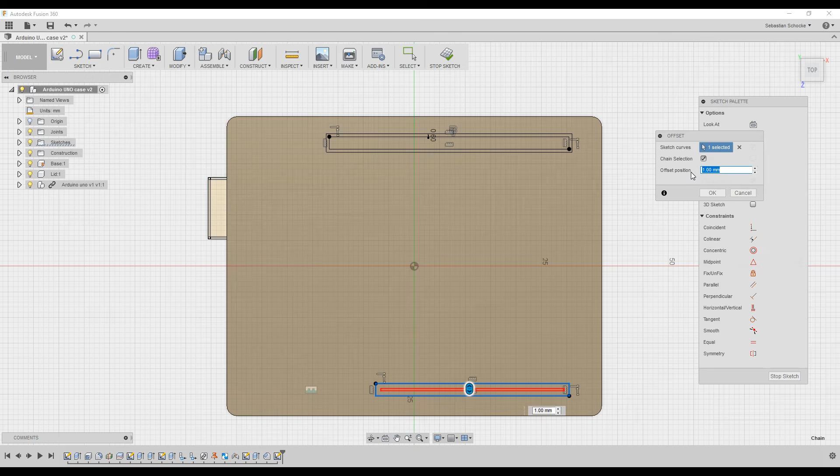In this case, that is exactly what happened, and I'm going to make it minus 0.6 millimeters. Use offset again. Same thing on this one, minus 0.6, and there we have our outlines now. Once again, geometry that's just inside becomes construction lines, so that it doesn't have any interference selecting the profile to extrude. Have easily selectable profiles.

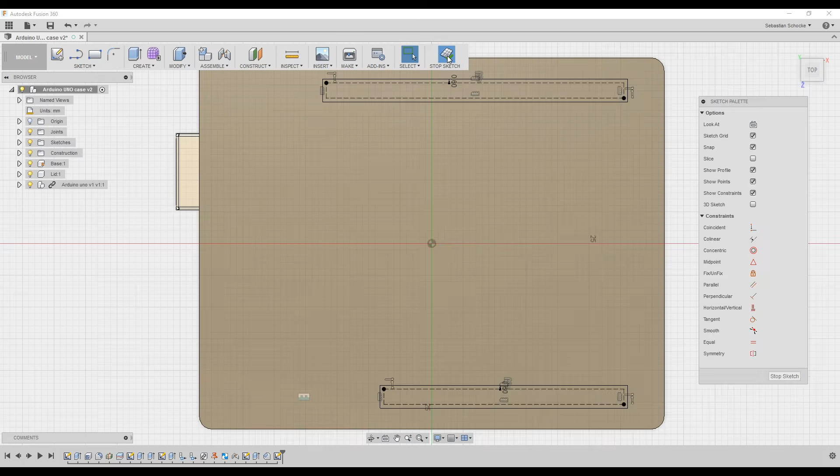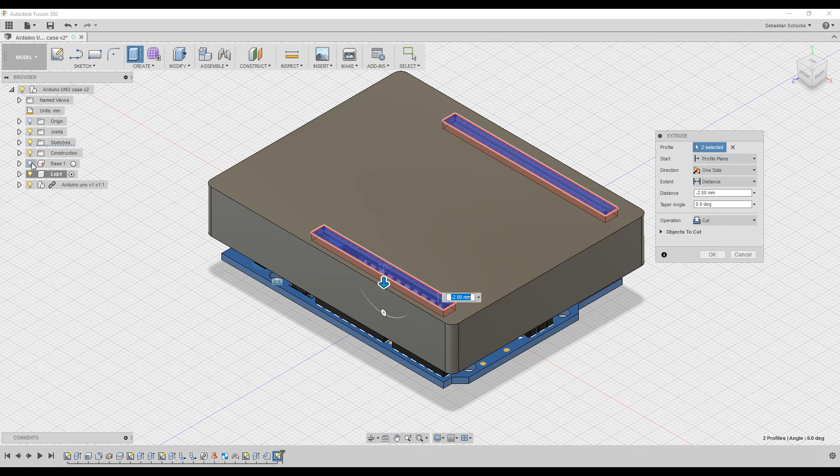I'm going to hit stop sketch and extrude. Select this profile, select that profile, 3D view, say I cut through this. Now, how far do we cut through it? Well, we could give it a fixed distance, but in this case we are going to use another nice feature of Fusion, and that is to specify that we want to cut through this just until the inside face of the lid. To do that, we will need to turn off the base and the Arduino UNO so that we can see inside of our lid.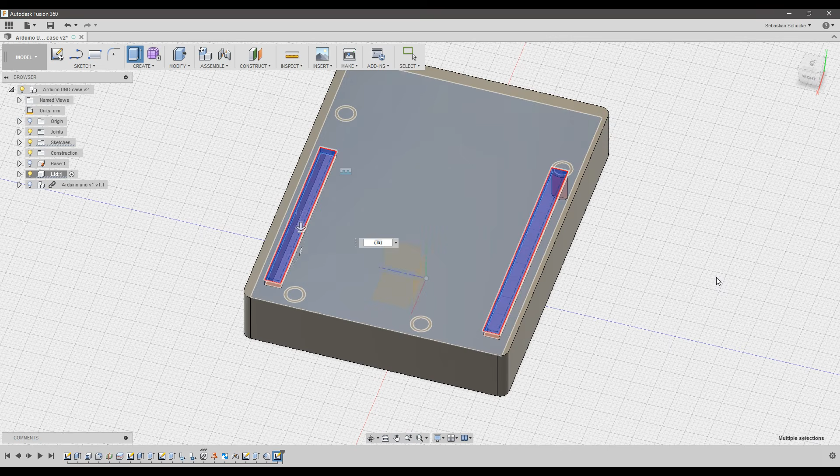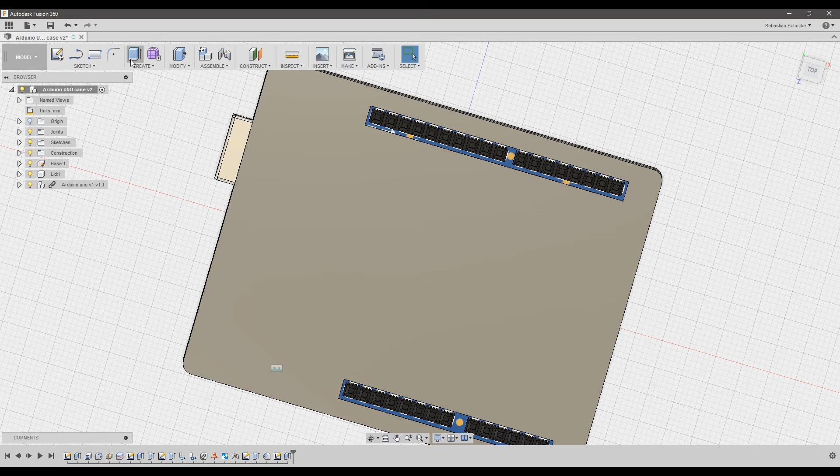Then we change the extent to object and we select the inside face of our lid. And okay, and there will be a cutout made to our lid. All right, let's make all of our components visible again. If we now have a look at the top of the enclosure, we see that the pins should be easily accessible via these cutouts. Save our design again at this point in time.

As a final bit of work, I want to add some grills on the top of our lid here. I'll add a new sketch onto the top of our design, and from here on out I want to introduce a couple of new concepts. First of all, I want to create a nice arc curve over here that will hopefully be our curve that our grills run according to. And second of all, we also need to be aware that we need to project in the standoffs that we have created, so we don't cut through our standoffs.

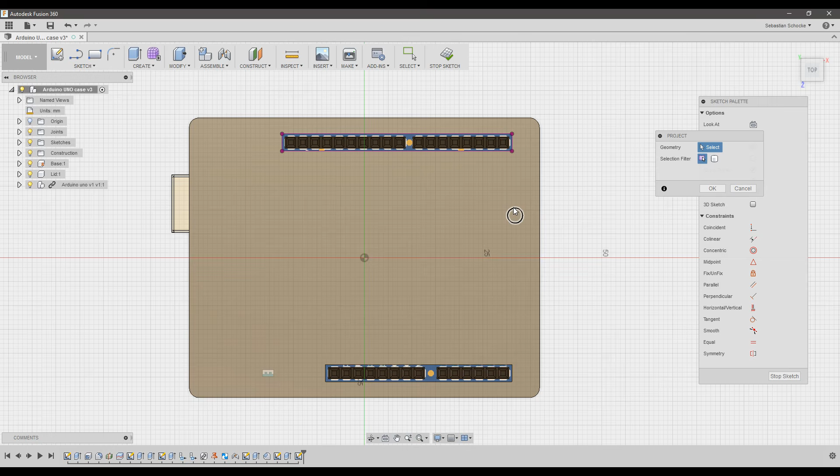What we'll do is we will project in our existing rectangle that we have here. We will project in our standoffs, and then that is all that we'll be projecting. Switch off all of our objects, so that we can just focus on the geometry of what we want to do.

And then we need to have an arc. So for the arc, we're going to use a 3-point arc. The arc between there. Oh, my mistake. I forgot to select in the cutouts at the bottom here.

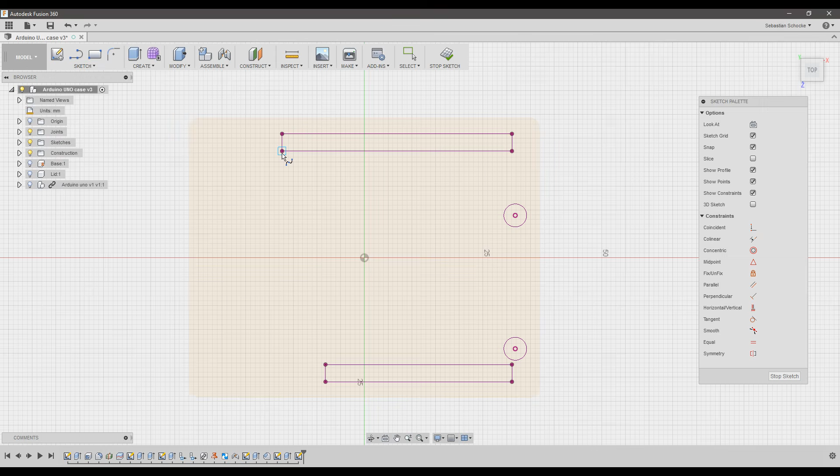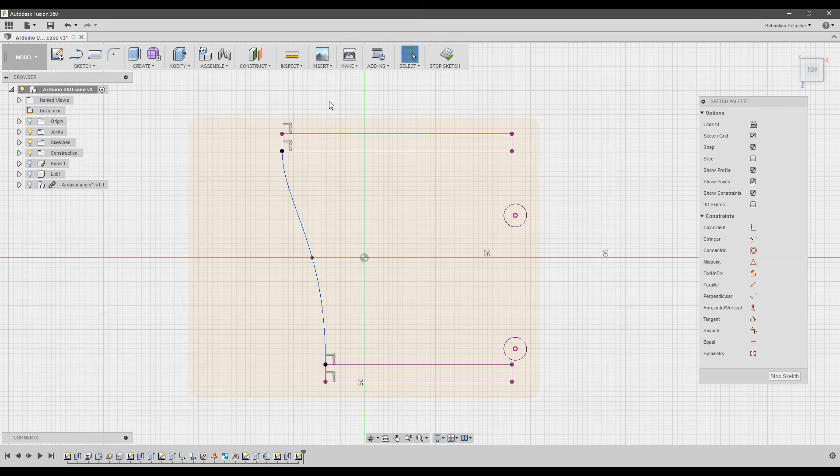Then what we are also going to do is we are going to use something called a rectangular pattern in our sketch. This means we are going to pattern this cutout that we have done here, pattern it that way. We want to have a certain amount of cutouts until what you think is sufficient. So this would be a cutout, that would be a cutout, that one, that one, that one. Hit OK, and now you should have multiple of that same cutout going across here.

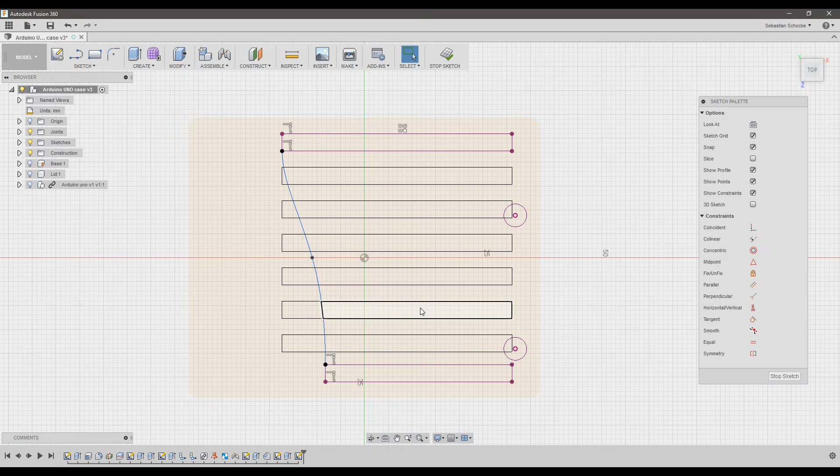What is good is with all of our geometry that we have projected in, and with our arc line that we have added in, we can now select these profiles as our cutouts. Do that, turn our lid back on, stop sketch, and we're going to use extrude. Now we can select these profiles that have been separately cut away from there and from our mounting pins.

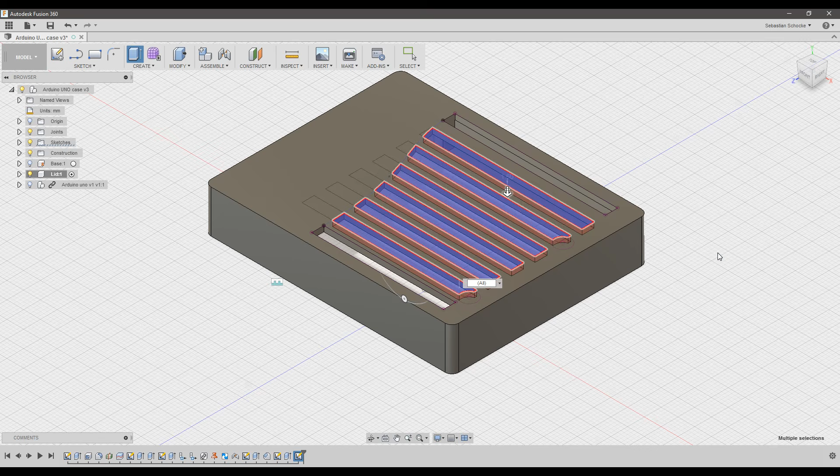Drag it down to select cut as the operation, and now this time instead of telling it to object, we are going to tell it to simply cut through all. Why through all? Well, our only object that is visible at the moment is our lid, and we want these cutouts to go all the way through our lid, so we might as well use the all functionality. Switch that, hit OK there, switch this back on. Now you should have a nice cutout on the top.

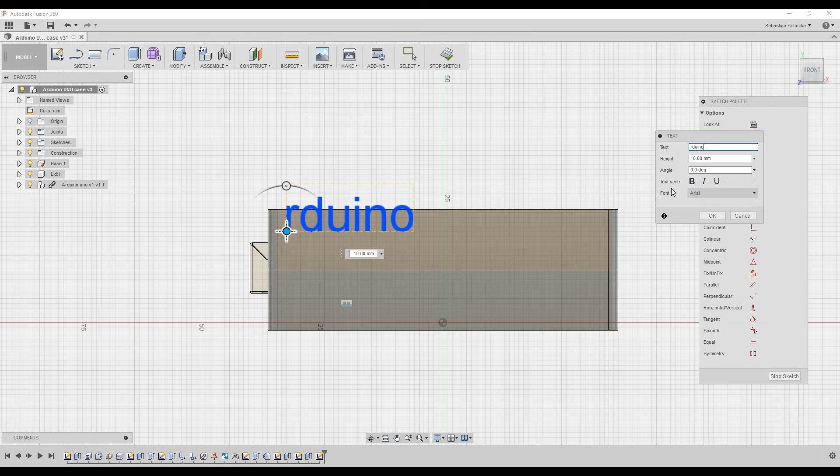To take this one step further, I also want to add some text. So we could go and hit create sketch and select this face to create it on, but for something simple like this we can immediately say sketch, just hit the face that we want to create the sketch on, text on, and start our text. My enclosure is going to say Arduino UNO. I am going to be using the Bauhaus font. I'm going to bold. At this point in time I can place where I want it to be.

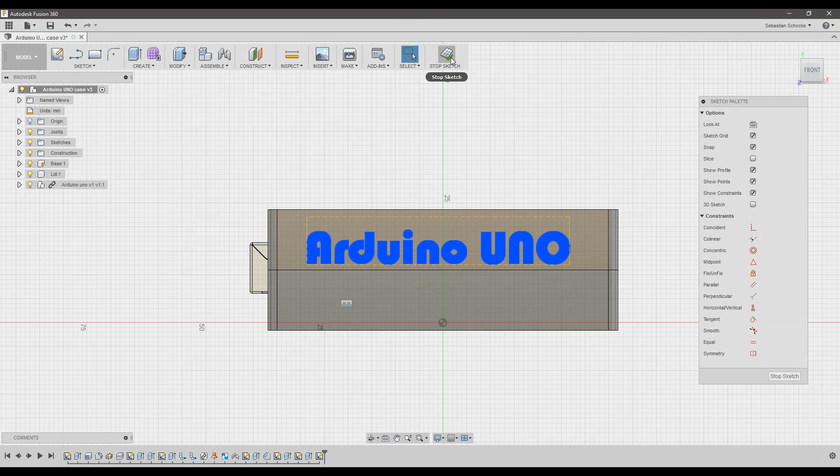Okay, and now I have this text on the side of my enclosure. I'm going to hit stop sketch. Once again, hit extrude. Select the profile of our text. Drag it in. Say I want it to be minus 0.5, 0.6 millimeters. Cut into there and some text cut out into the side of your enclosure. I'm going to save it before we continue.

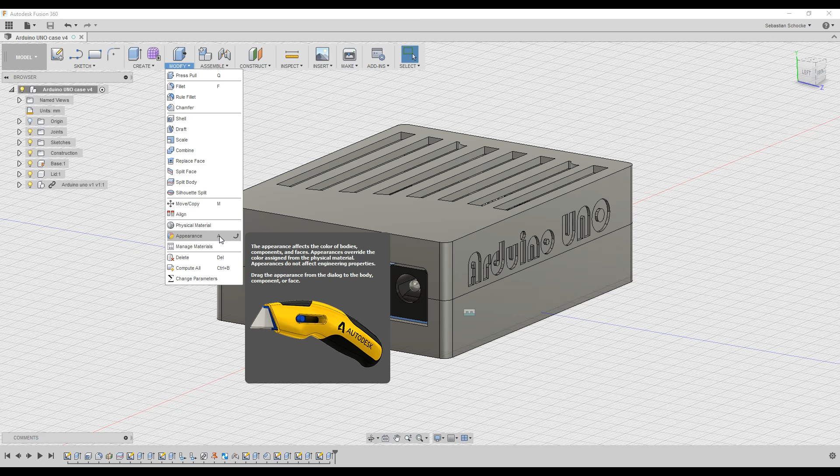As our last and final step, we are going to add some color to our enclosure and also make a realistic rendering of it. To add some color, we go to modify appearance, or you could also use the shortcut key A, and you will be presented with a set of materials that can be applied to your components. For mine, I'm going to use plastic since we will be 3D printing this. Pick an opaque plastic, and I am going to go for a matte green lid and a matte red bottom base. And now we have applied some materials and we have some color in our design.

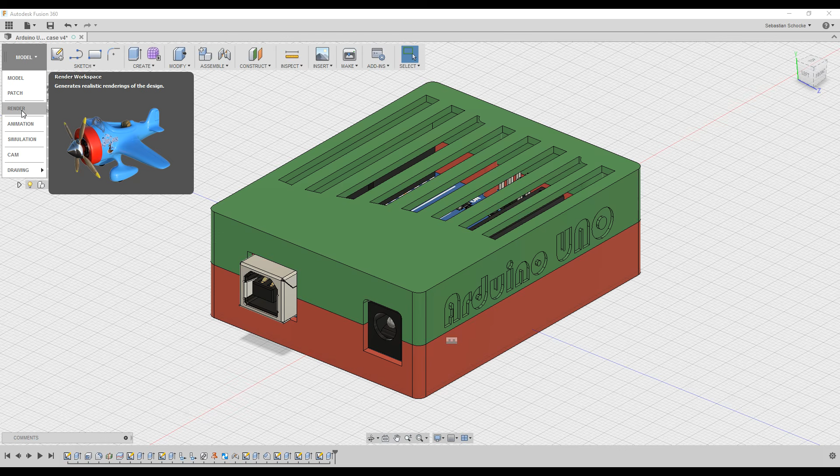Now, to render this in a realistic environment, we simply switch over to the render workspace, and you should immediately see it will be presented in a more 3D perspective type view. And now you can hit the in canvas render button. Given a bit of time, processing power, we will soon have a photorealistic version, or at least semi-photorealistic version of our Arduino that can be exported and shown. And there you have it, a photorealistic rendering of what your Arduino UNO case may look like once it has been 3D printed and assembled.